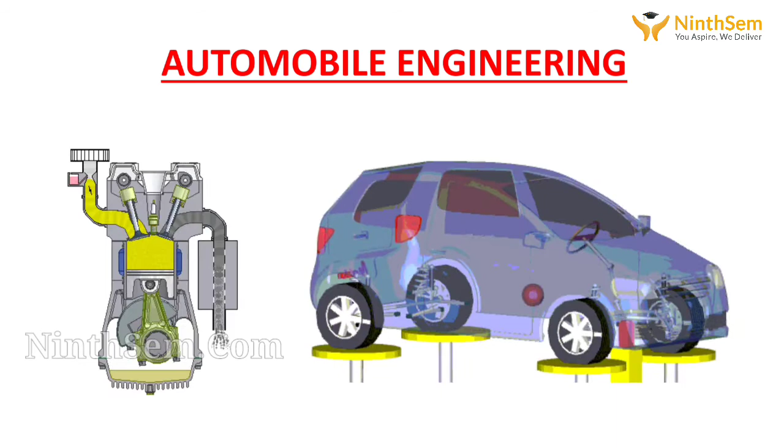Let's have a brief discussion about the career aspects. What are there in automobile engineering? Basically, when we talk about automobile engineering, we discuss two sectors or two parts.

Once we deal with automobile engineering, it's all about higher studies, in which we deal with MBA, MS, or MTech, where the management aspect is the MBA sector and the technical aspect is the MS or MTech.

For MS, you need to have a GRE score or TOEFL score, whereas for MTech, you need to prepare GATE. Talking about the other part, it's the private sector, where you deal with MNCs and its various R&D sectors.

When these two combine, we profoundly go into three areas. That is the commercial vehicle part, in which we deal with all the pickup vans, trucks, etc.

The second part is the passenger vehicle, where we deal with cars, buses, etc. The third part is the advanced engineering part, where we deal with future scopes or future vehicles, that is the trend towards electric vehicles or hybrid vehicles.

Now going on to the introduction part of automobile engineering. Nowadays, the amount of automobile vehicles keeps on increasing every day. Ever wondered who are the players behind this growing number of automobiles?

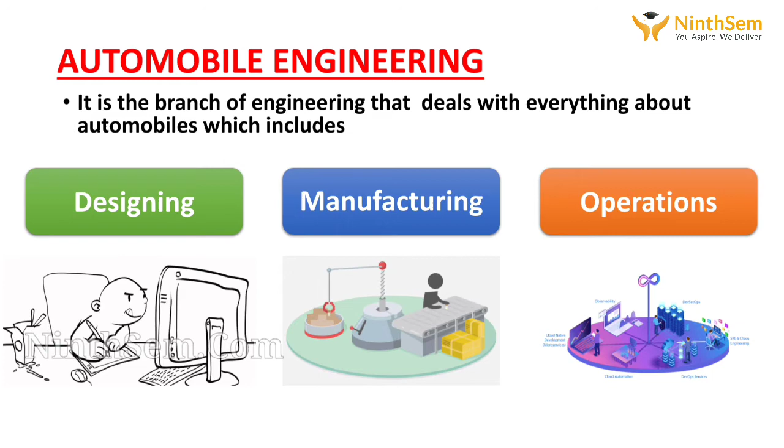So the sub-disciplines which we're going to talk about in automobile engineering are all about the safety aspect, the vehicle dynamics, performance, shift quality, durability, and electronics.

Starting from the safety aspect, first we deal with the crash test. It is the first and foremost thing when we design a car, a truck or any automobile.

First and foremost is the safety, for which the crash test has been performed, and the longevity as well as the impact factor needs to be cleared first.

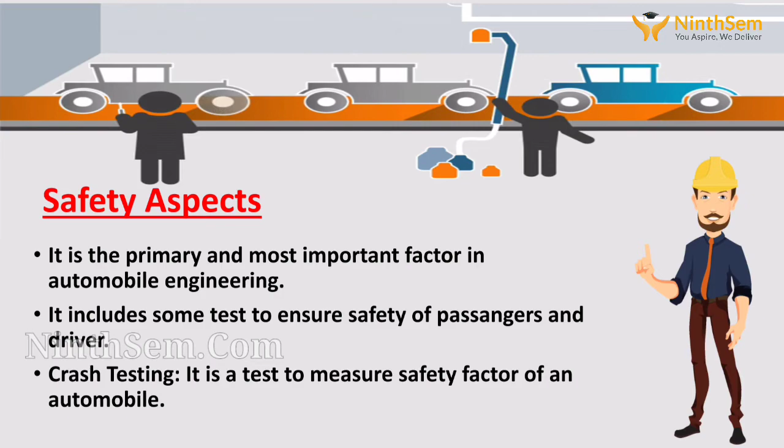Then about the vehicle dynamics. In case of vehicle dynamics, the braking system, the handling system and the steering system are going to be an important part of any automobile.

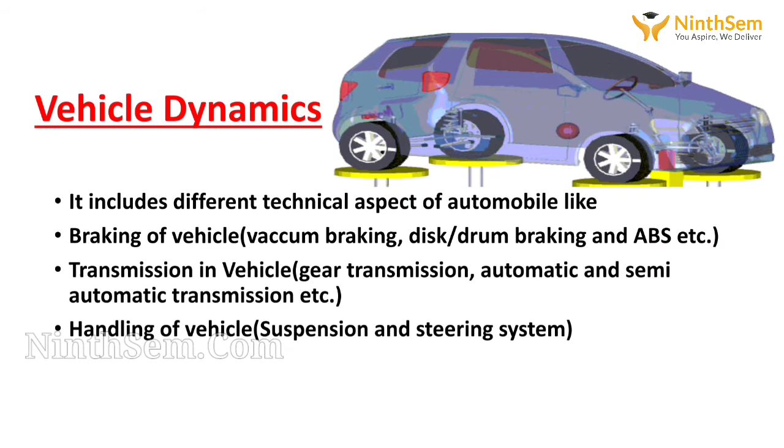And the performance, including the fuel economy which includes the mile per gallon, the mileage - everything has to be as per the given standards and norms mentioned before.

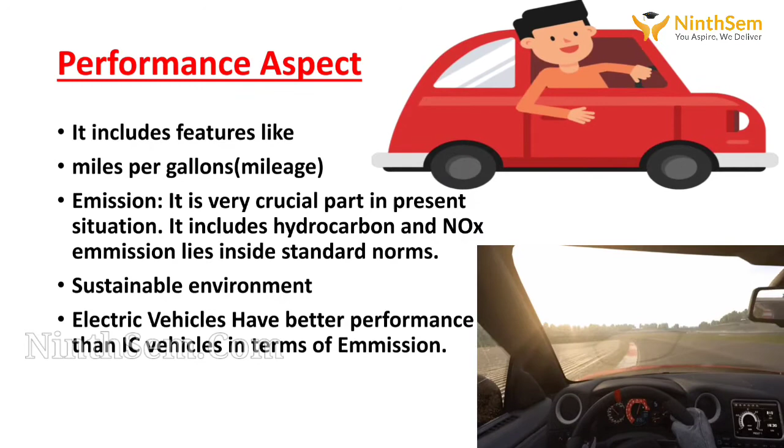The performance also includes the emissions, which have clear-cut norms which need to be followed, including hydrocarbon emissions, which are a very crucial part in today's environment, as today's environment is

moving from a polluted environment to a clean, green and sustainable environment.

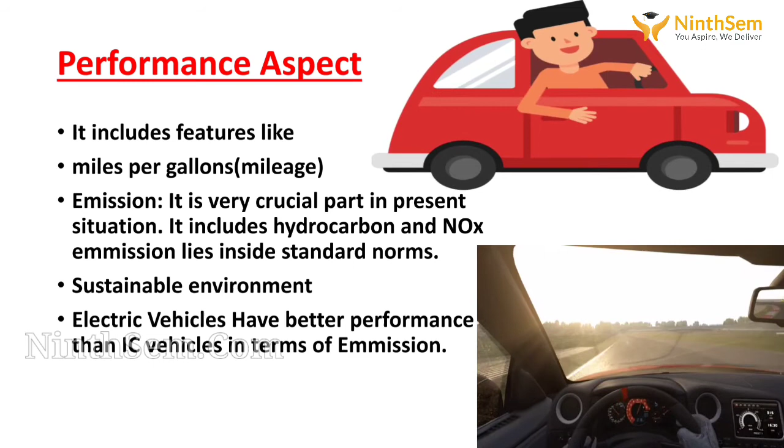When we talk about sustainable environment, EVs have better performance than normal IC vehicles. Then the shift quality, durability and electronics play an important role in automobile engineering.

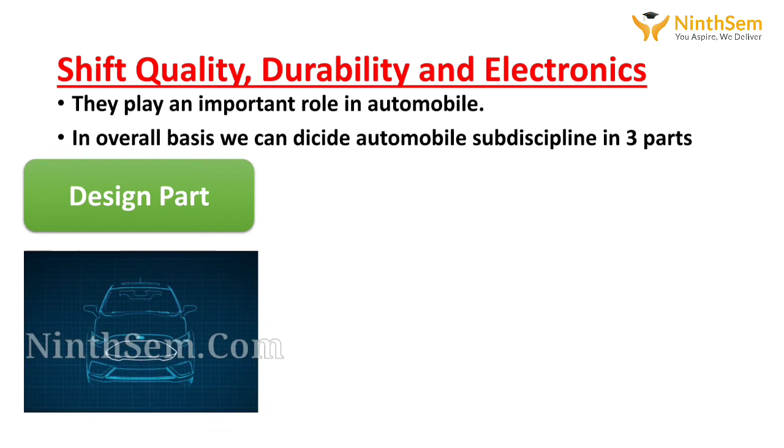As a sum, automobile engineering can be classified into three parts: the design part, the testing part, as well as the manufacturing part.

In the design part, it is the first step towards any vehicle or automobile. The design step has to be a crucial part in any automobile sector.

The design can be done using various CAD softwares like Creo, CATIA, and the basic idea of an engineer or R&D expert needs to be implemented in this design field only. The first and foremost step towards any new vehicle has to be implemented at this stage only.

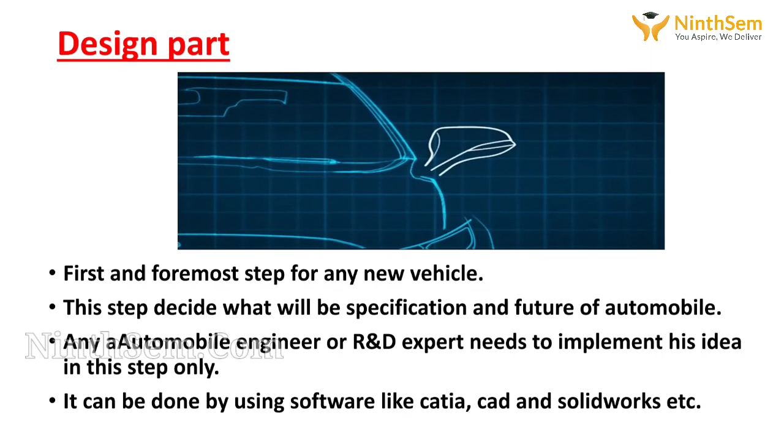This step decides what's going to be used, what's going to be produced in the near future, and what will be its specification.

The second part includes the testing part, in which we do the basic testing of the performance of the vehicle in a testbed as well as at the vehicle level.

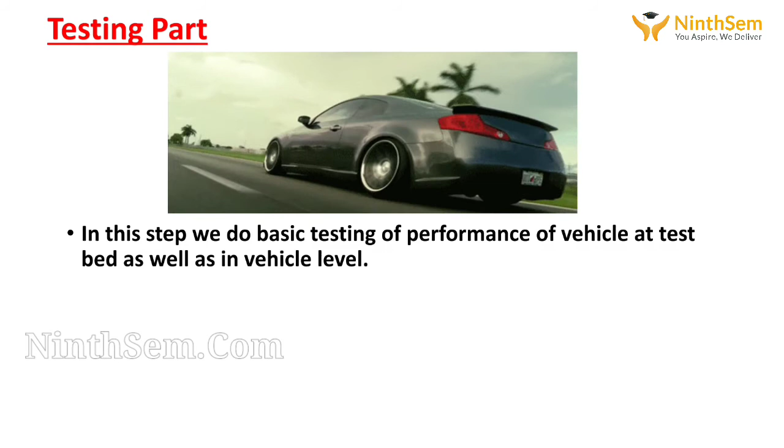In this case, we have two departments: the product validation part as well as the performance analysis part. The product validation team has to describe what exactly the dimensions, specifications and exact norms are, to which the proposed

values have been given, and whether it's matching or not. The performance analysis team analyzes every performance that a vehicle gives and decides whether the given performance is valid or not, based upon the previous forecasted values.

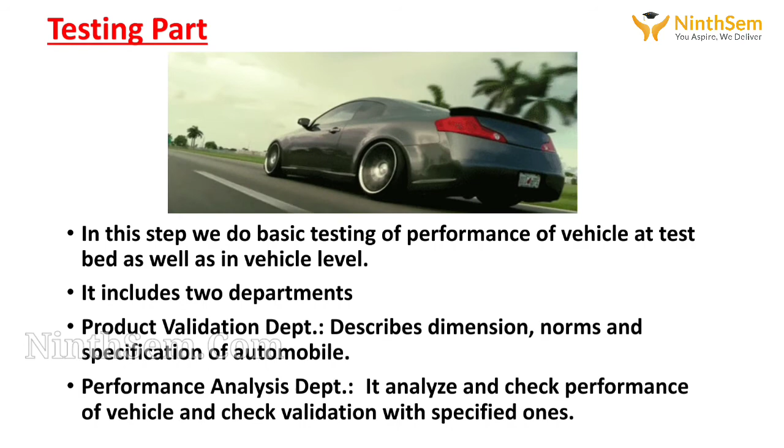The third and most important part is the manufacturing part. In the manufacturing part, it's all about the ideas which were developed on a software basis, which need to be produced.

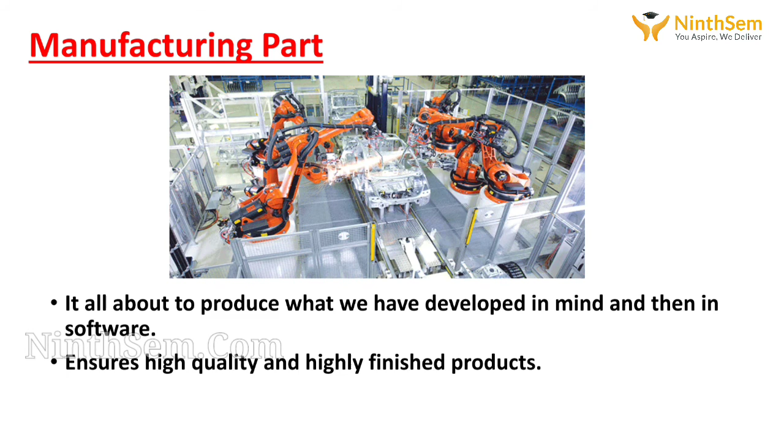So the basic parts of an automobile - the chassis, the gears, the transmission system, everything - need to be of very high quality, meaning a highly finished product.

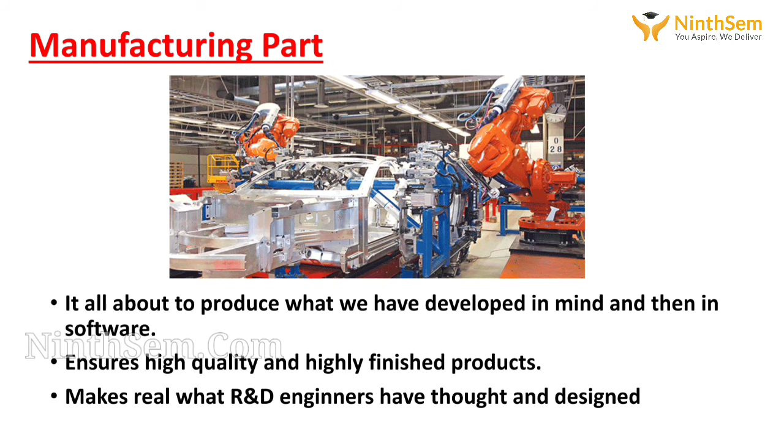Talking about automobile engineering, it's not that only an automobile engineer can be in the automobile sector. There are various domains, or various engineers, which can play a vital role in the automobile sector.

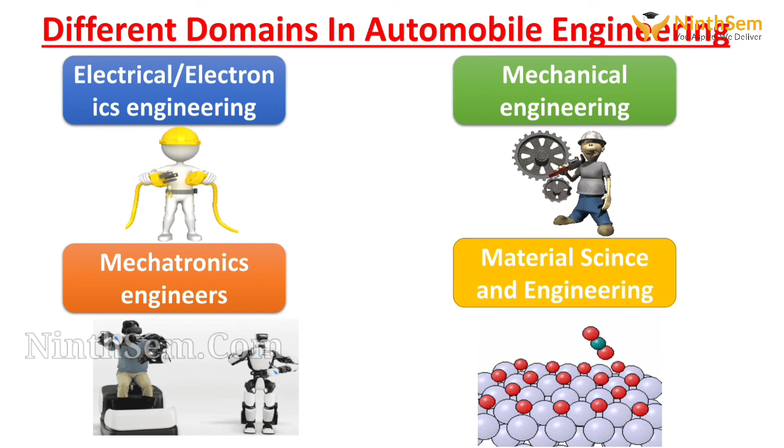They are the mechanical engineer who deals with mechanical stuff, the electrical and electronics engineer who deals with the electronics part, the material science engineer who describes what material is going to be used, and the mechatronics engineer who describes the types of sensors used in upcoming EVs.